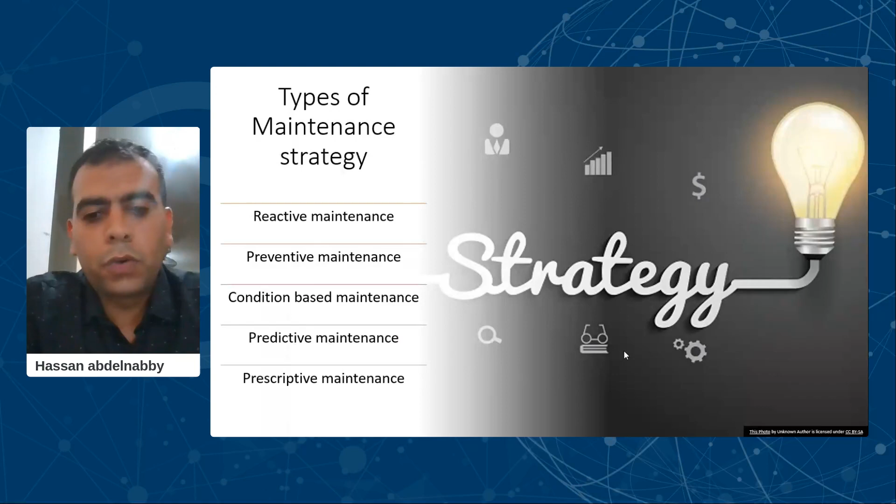So with this evolution of industry, there was an evolution of the maintenance strategies. There are different types of maintenance strategies like reactive maintenance, preventive maintenance, condition-based maintenance, predictive maintenance, and prescriptive maintenance. So we're gonna try to simplify things and talk about every strategy with an example.

So let's say that we have a pump. It is our asset. We love our pump, so we installed it, and we are wanting from it a certain amount of pressure and flow. So this is the function of this pump.

So the first strategy mode is the reactive mode. When you leave this pump running without doing any intervention in order to make the pump continue running with the same performance, your maintenance team is more or less like a firefighting department. They are waiting for the pump to stop for any reason, maybe a bearing failure or impeller defect or something like that, and they intervene in order to restore the condition of this pump.

So after a while of using this reactive maintenance strategy, they found out that it is costing more than they gain from it. Okay, so they switched a little bit to the preventive maintenance strategy. They follow the OEM recommendation to change the bearing maybe every 5 years. So they started to perform these preventive work orders in order to keep the pump running as smoothly as possible, giving the efficiency required from this pump.

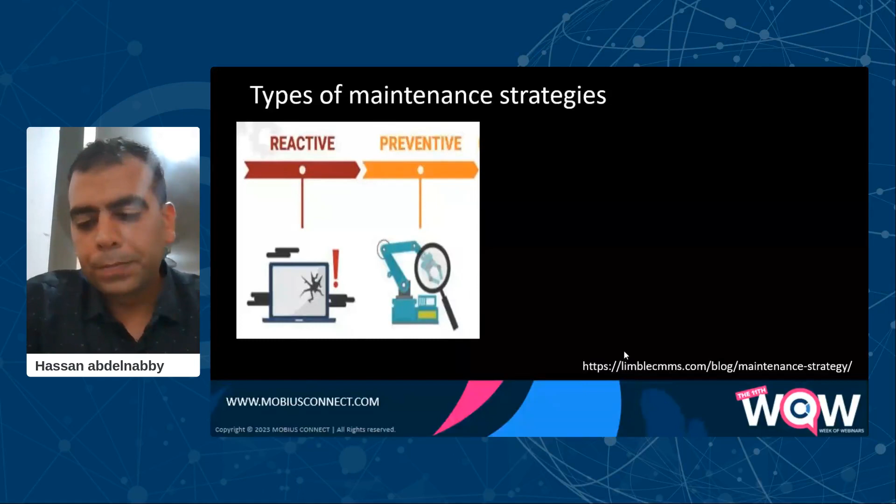But again, after a while, they found out that every time they open the pump and close it back again, they increase the probability of failure, doing something wrong during this maintenance, or even introducing a bad item on the pump. So they try to minimize the amount of intervention by developing the maintenance strategy concept using condition-based maintenance.

So condition-based is, from the name, they follow the condition of the pump, the bearing, or any asset. They follow the condition according to certain parameters that they have, and they tell the maintenance team when they can perform the interventions that they want. So this reduces a lot of the time needed for preventive actions, and also gives the medicine to the sick when he actually needs it.

But there is more on this trend. So predictive maintenance is the evolution of condition-based maintenance. This is using the data coming out from the condition monitoring program and integrating it with different technologies and algorithms, using historical data, maybe using a certain special algorithm, in order to predict the lifetime remaining for the asset without any failure.

Doing it, especially this type of maintenance strategy, is a little bit far from the normal maintenance plans or maintenance factories that I have seen. But this is a new trend for this technology. From my point of view, this is a natural development of condition-based. You need to integrate more data in order to actually assess the true condition of the asset you have.

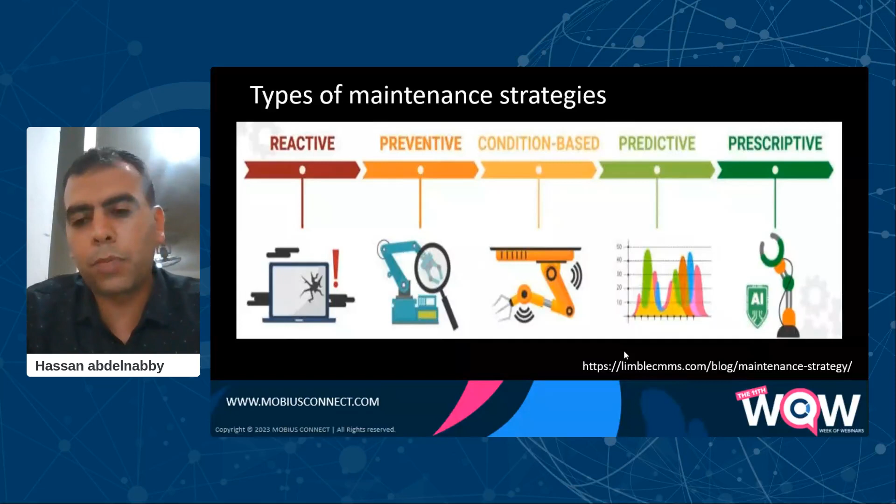The last maintenance strategy in this graph is the prescriptive maintenance strategy. And this is one of the future dreams: using AI in order to give you certain actions to deliver. Reduce the speed of this pump. Stop this pump and perform the maintenance now. Or switch on the other pump because this pump does not give you the performance that is needed. So this is the further development of the predictive maintenance strategy.

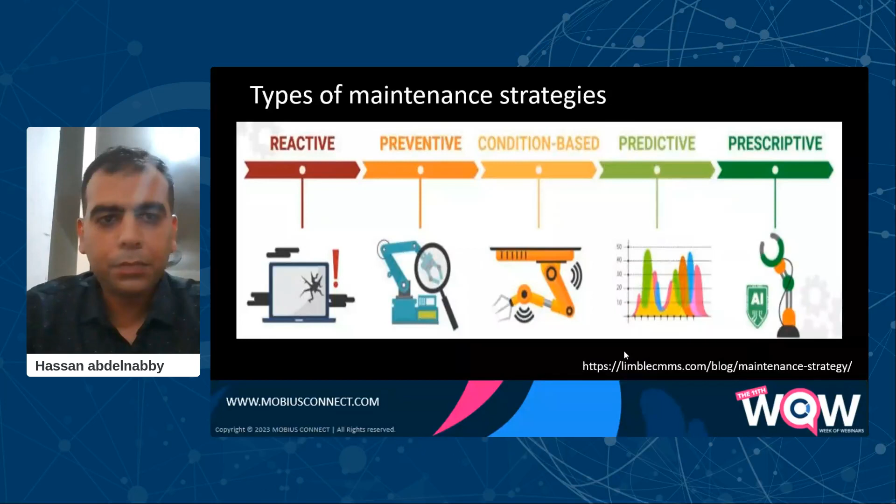There is a different type of maintenance, proactive or precision maintenance, which is do it right the first time. It focuses on performing the precision alignment, precision balancing, the correct installation procedure in order to avoid most of the problems that can happen to the pump. So try to think what might happen to the pump due to the preload coming out from the misalignment or the forces coming out from unbalance, and try to eliminate it in order to give the pump a chance to live for a long time without any failure.

So there is a question now that pops up. Which strategy should I follow? From my experience, you need first to review the company goals and objectives and align your strategy with the company goals. You also need to create an asset list and start working on the criticality assessment, reviewing the organization's culture in order to build a good business case.

It's not logical to work in a factory that has a reactive culture all over it, in all aspects, not only maintenance, and you come out and say I need to apply prescriptive maintenance or predictive maintenance. So you need to come up with a good business case in order to obtain good support from the top management. You can do this by building a small project on a small asset in order to create what is called a small win. Of course, the availability of skilled manpower or a condition monitoring tool or a CMMS or any other ERP program can help you decide which strategy you should follow.

Of course, during this research, they talked about the failure pattern. The failure pattern can be age-related or random. Sometimes you are happy to have the bathtub curve, which my colleagues at the WOW event talked about a lot. You start with infant mortality, after that normal operation, after that you go to the wear out phase. But as you can see, the amount of age-related failure patterns might be like 11%. The most common failure pattern that you see working in any plant or any industry is random.

Maybe this is from the start and finish with the random, or you can go to the factory and the equipment already passed the initial break-in period and works with the random effect. So, for the infant mortality, the most common is when you try to do any maintenance activity, maybe you increase the probability of failure, but after a while the probability is the same until the equipment breaks, which leads to using condition monitoring to help you determine the actual status of the asset.

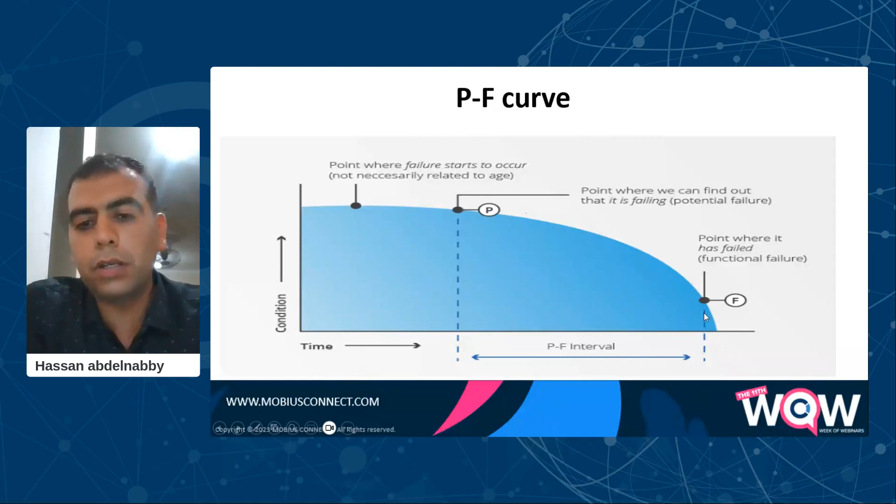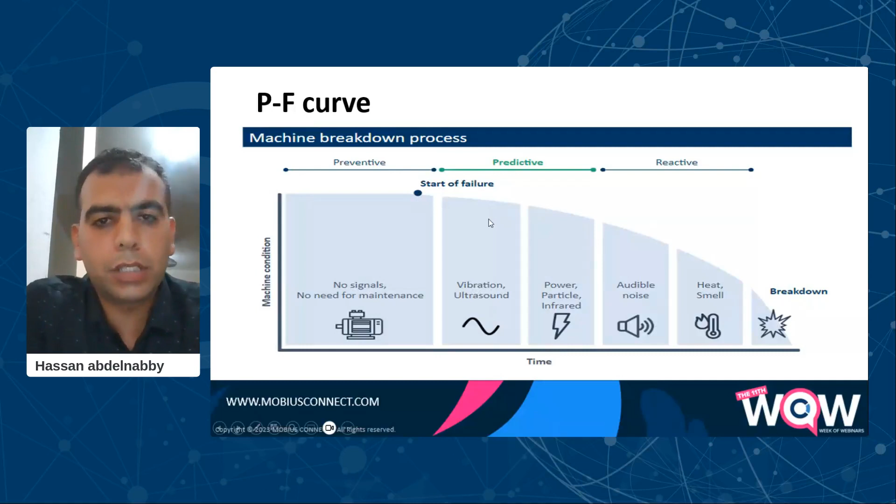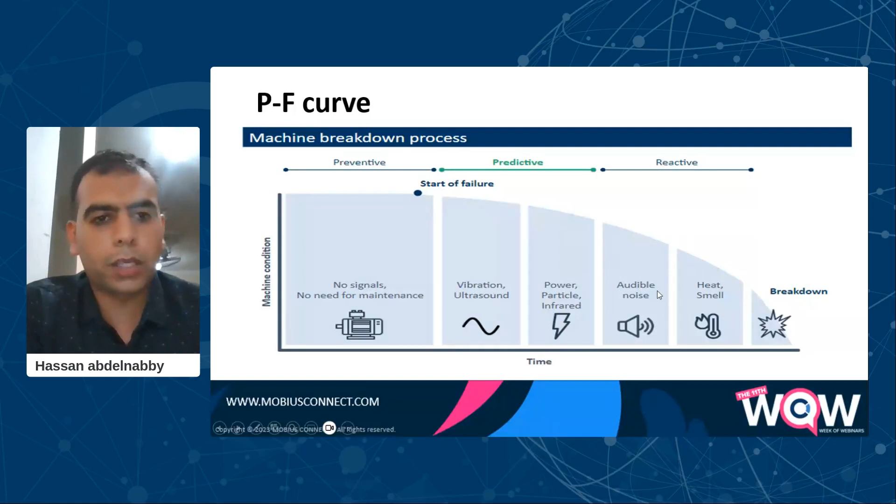If we look at this graph, you can see that once the failure happened, you can use the technologies in order to give you a good lead time, in order to stay away from the reactive mode when you hear the sound or you smell, or maybe you get a call at 1 a.m. telling you that the pump is already damaged.

So after what we discussed, do I really need a condition monitoring program? From my point of view, the short answer is yes. Of course, yes. If you want to make sure that your asset is working efficiently according to the parameters, you have to choose these parameters with the team members in order to monitor the performance. You need to come up also with the KPIs.

So in order to evaluate the performance of an asset that you think is important for your process, you need to use condition monitoring technology in order to determine the actual status or the actual health of your asset. So condition monitoring has some advantages, like it doesn't need the equipment to be stopped; most normal condition monitoring is done while the asset is running. So this gives you the chance not to disturb the normal operation.

Of course, this reduces the cost of asset failure by detecting early failures, and can improve equipment reliability because it gives yourself time to plan, or gives time to the planning team to get the job done efficiently. And of course, it improves worker safety.

But as you can see, the disadvantage is the technology is expensive. For most of the plants that are struggling with the current economy, introducing this kind of technology might be expensive for them, even though with time it becomes more and more affordable. Of course, it needs solid knowledge in order to determine which type and how to select the vendor. And the tool itself needs special care.

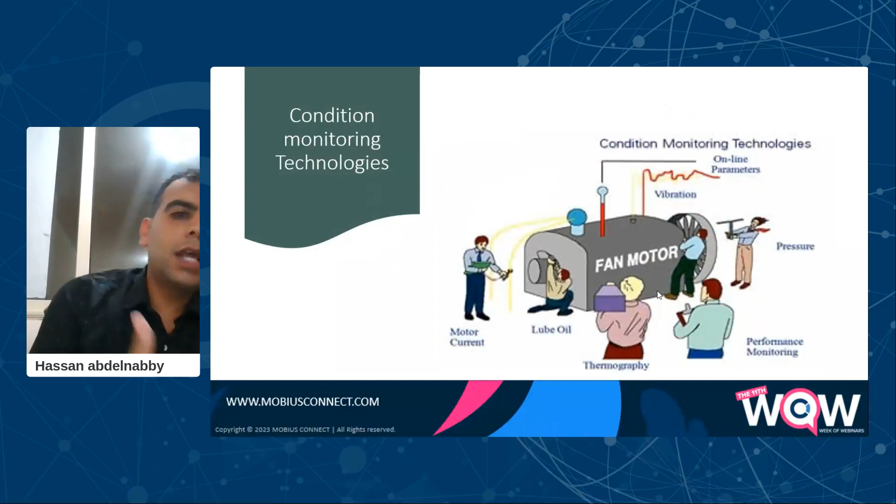So we're going to discuss now some of the condition monitoring technologies that are available now on the market. So, types of condition monitoring technologies, like ultrasound. You can use ultrasound to find air leaks or steam leaks, or you can integrate it with lubrication in order to give the proper amount of grease to your bearing, which can lead to a huge reduction in your lubrication program. It can detect an early bearing fault.

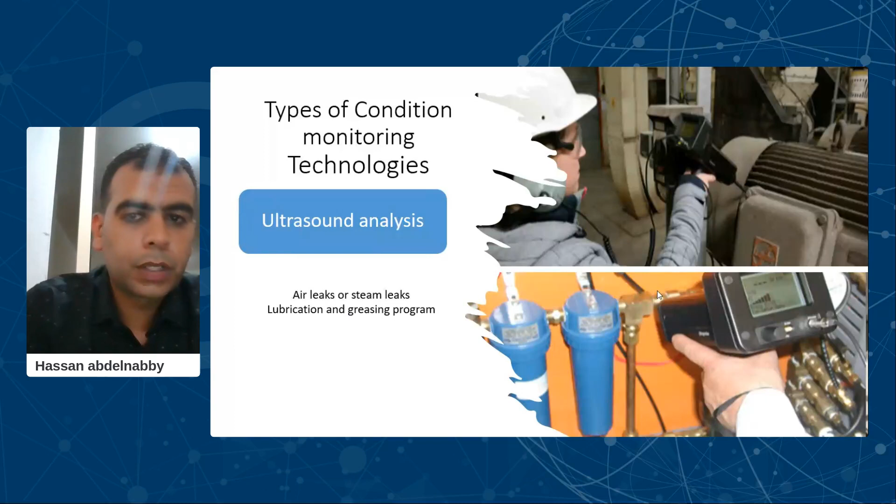In my situation, I work in a paper mill, so the lead time for the Yankee bearings, which cost 50,000 euros, is like 9 months or 1 year. So using this kind of technology can give you a good estimate that you need to issue a work order or a PO in order to get the required material if you think that you have a problem or a defect. Of course, you can use ultrasound in detecting electrical discharge events like arcing and corona.

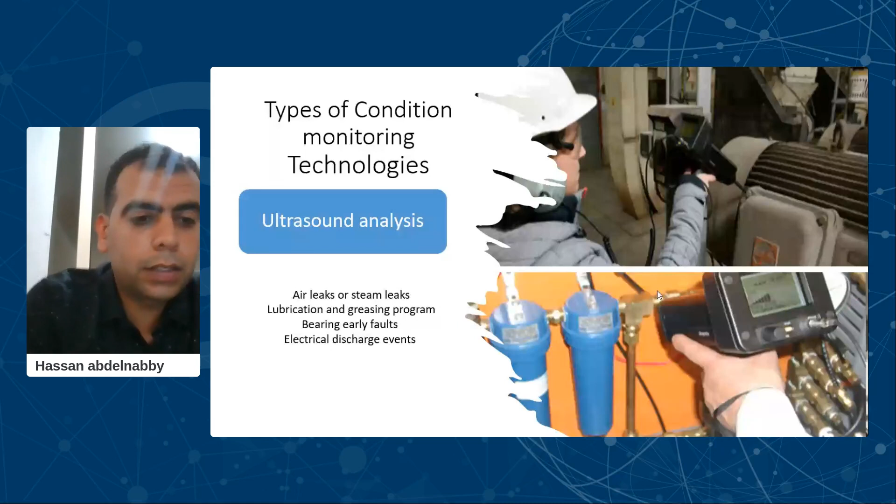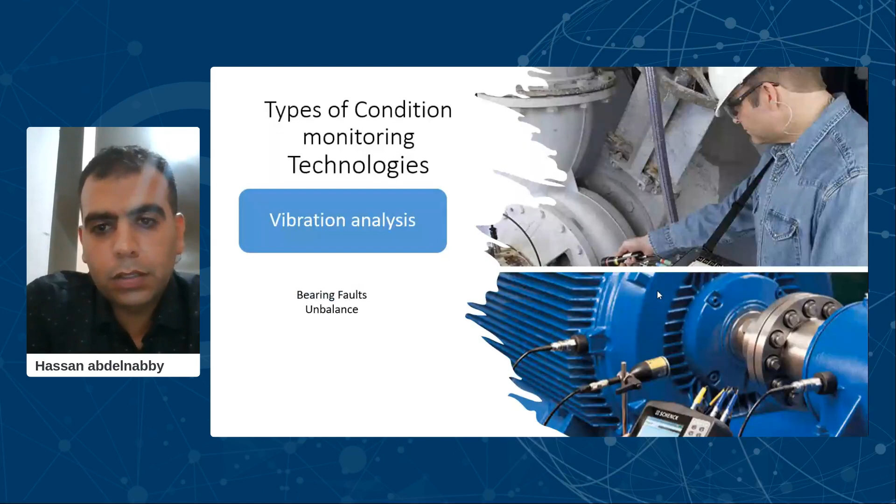My favorite is vibration analysis. You can use it in detecting bearing faults, diagnosing unbalance, misalignment, looseness. Of course, you can use it also in lubrication and cavitation detection.

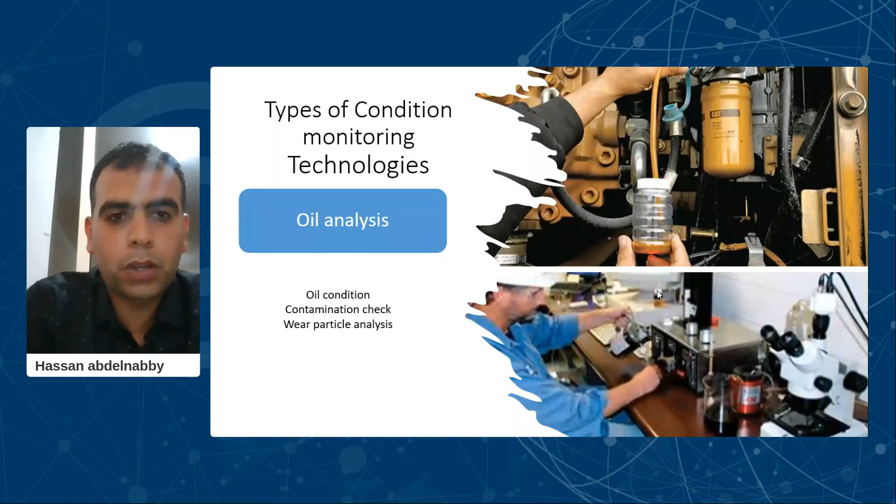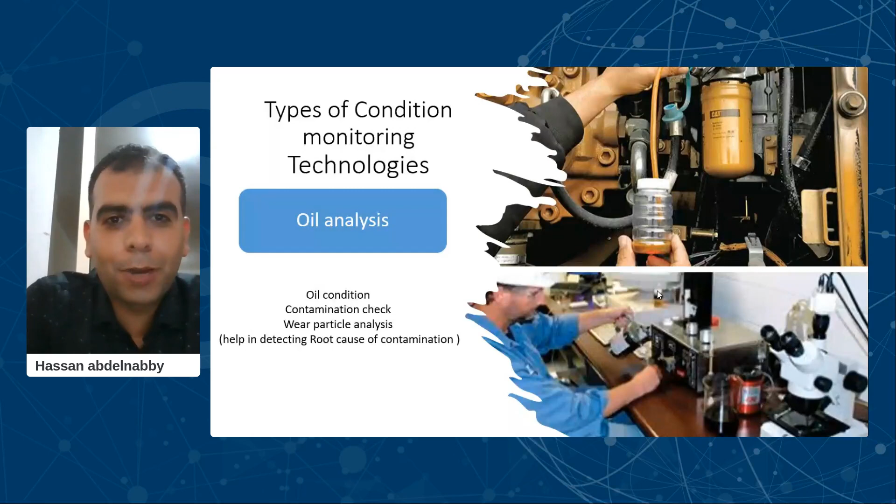Oil analysis can determine the condition of the oil, the contamination check of the oil, and of course, you can perform a wear particle analysis, where you take the particle itself and look at it under the microscope, or what's called ferrography. It can help you detect the root cause of this contamination. So if you analyze the wear particles and you find copper, and the only copper exists on the cage of your bearing, you are in trouble.

Another technology is thermography. This uses a thermal camera to detect the emission of the equipment. You can use it in mechanical wear and rubbing detection, steam trap monitoring, and electrical faults like loose connections.

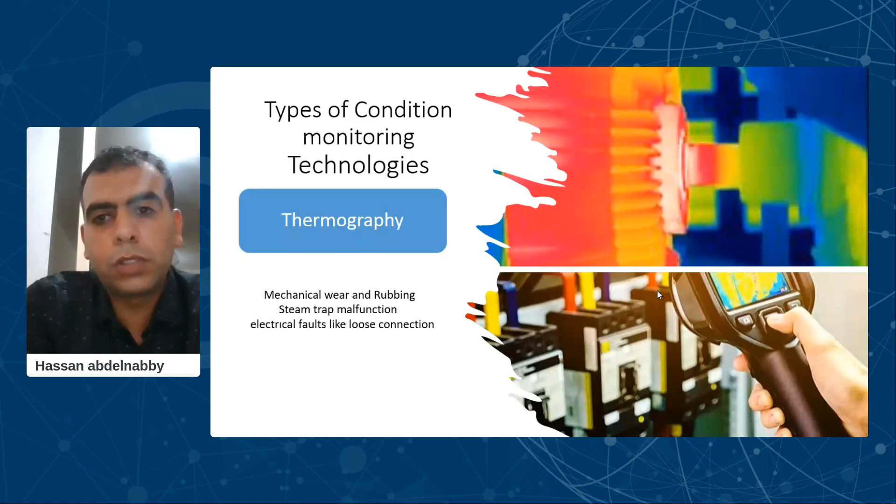Motor current signature analysis can detect or determine broken rotor bars or end rings, check rotor stator winding status, lamination and connection issues, and also detect power supply issues.

So how can I select the best fit technology? From my point of view, you need to create the asset list, determine the criticality of the equipment, review the history log in order to come up with the bad actor list. After that, you need to choose the technologies that can detect the failure mode. So you need to apply the FMEA, small FMEA, or accelerated RCM, in order to detect which failure modes and what is the best technology that can detect this failure mode.

After deciding that you need maybe a vibration analyzer, you need to decide what level of monitoring you need to do. You can purchase a small device that gives overall readings and start monitoring the condition using this. I'm not saying it's efficient, but you can start with it if the company allows you to take small steps in the reliability direction.

Or you can go with online monitoring that gives you a complete analysis for the asset.